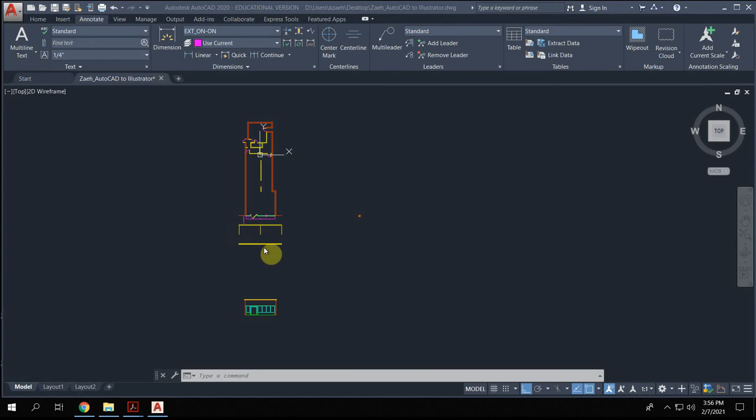Okay, so we're going to be talking about going from your AutoCAD drawing into Illustrator to make your final drawing. I'm going to use the exact same stuff I had for my AutoCAD tutorial in order to do this. So personally, let's take out the dimensions though. There's probably a nicer way to add those in Illustrator.

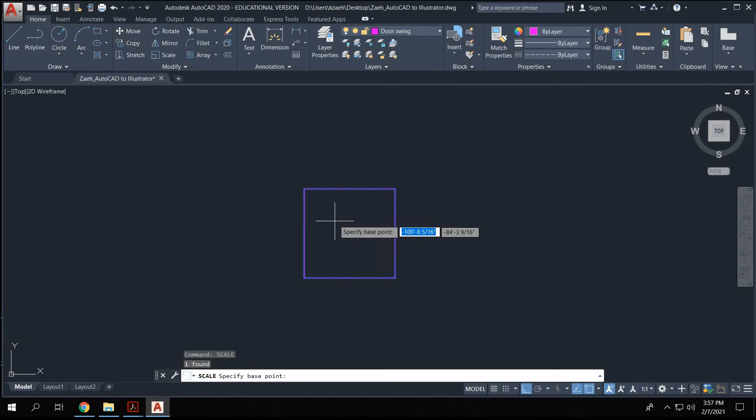Okay, so this represents my piece of paper. I know that my drawing is going to be at a much smaller scale in order to fit on the paper. So to start out with, I always scale it by 12. And automatically, that is what would fit on the paper if we were to make the drawing at 1 inch on my drawing equals 1 foot on my paper, right?

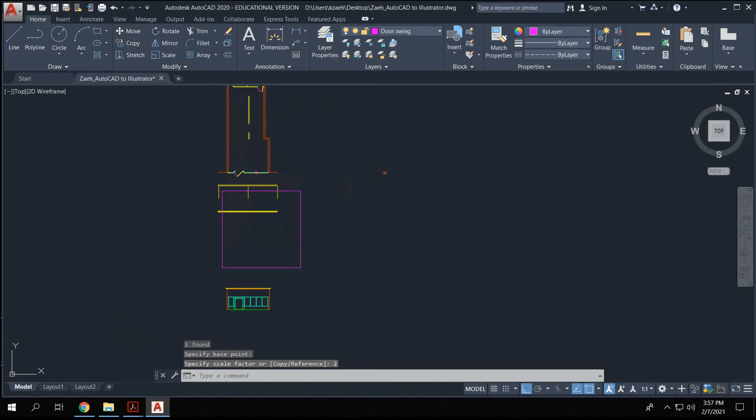We already know from the AutoCAD tutorial that this is going to be about 1/4 inch, I think, or we do 1/2 inch. 1/2 inch equals 1 foot. So I'm going to double the size of this. So I'm going to select it, type in scale to the base point, and type in 2, and that'll make it twice as big. So now this is my piece of paper I'm working with.

And let's see if that feels adequate. I actually think that's way too small. Not way too small, but I think, well, I guess we don't need a lot of the storefront in here, but we still want to get in our elevation. So I'm actually going to undo that.

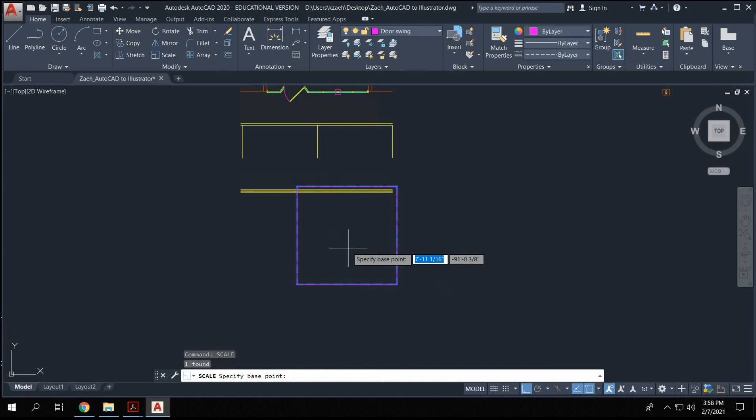So now we're back to our 1 inch equals 1 foot paper. I'm going to scale this by 4. And now if we have our drawing at our main drawing at 1/4 inch equals 1 foot, that's how much space we have to work with. So I'm going to move this. So let's imagine that we're going to fit the plan on here.

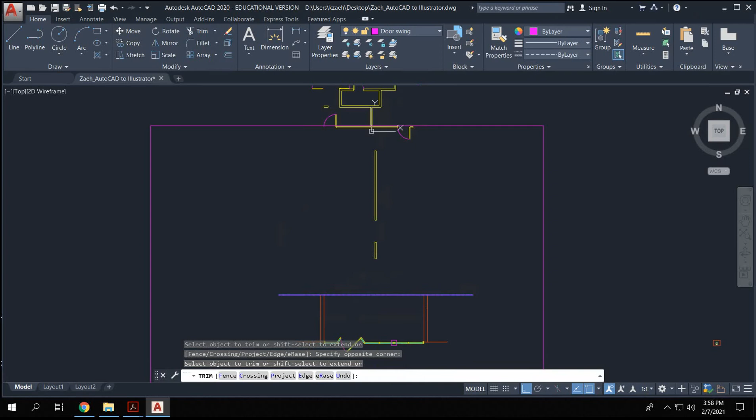I don't want all of this plan, so I'm actually going to chop off what I won't use. So I'm going to draw a line here and then trim off the whole back of this that I'm not planning to use in this drawing. And I can make this a break line so that I know that this building continues, but my drawing does not. So to do that...

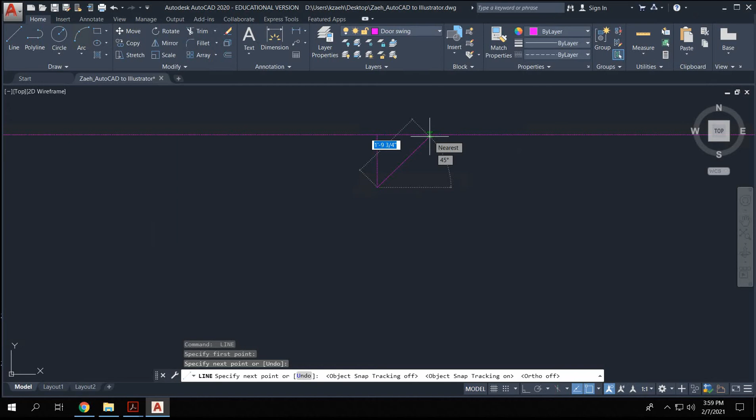I'm going to come to the middle of it, draw a line straight down, and then a line, I think it wants to be at 45 degrees. Let's turn off my ortho so it'll be happier doing that. So I think it wants to be 45 to there, click, and then same thing on the other side.

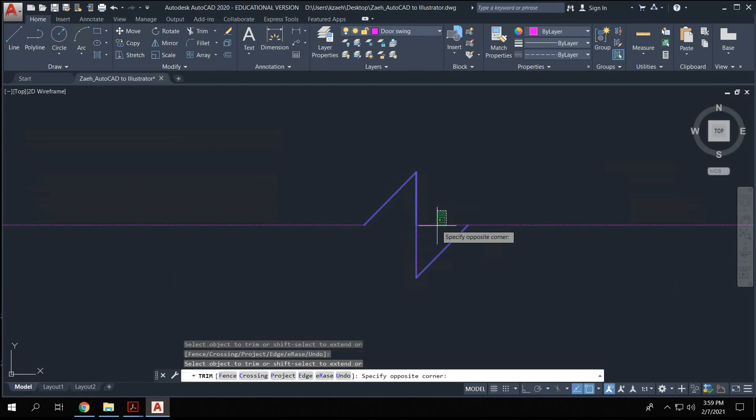So I can just take this and mirror it once. And then I can take it and mirror it again. And then I can delete this and trim out the middle. Trim out that, trim out that. Okay, so now I have my little break line that explains that like this building keeps going, but my drawing stops here.

So I have this. I like to get everything lined up ahead of time, so I know that I want my elevation above my plan. So I'm going to go to my guidelines layer, which I think is just 0, and I'm going to draw in some lines that will allow me to do that.

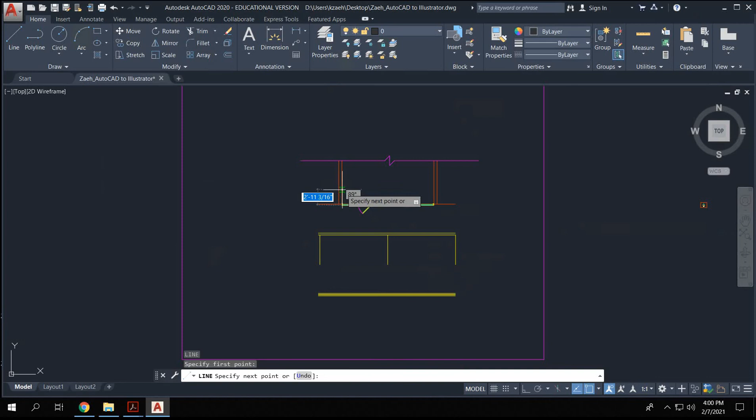So I'm going to bring these. Should I have my ortho off? So put ortho on for this. I'm bringing these lines straight up. And then I'm going to bring my elevation up so I can line it up. And that looks like it's all aligned there. So I'll have my plan there and all my elevation there.

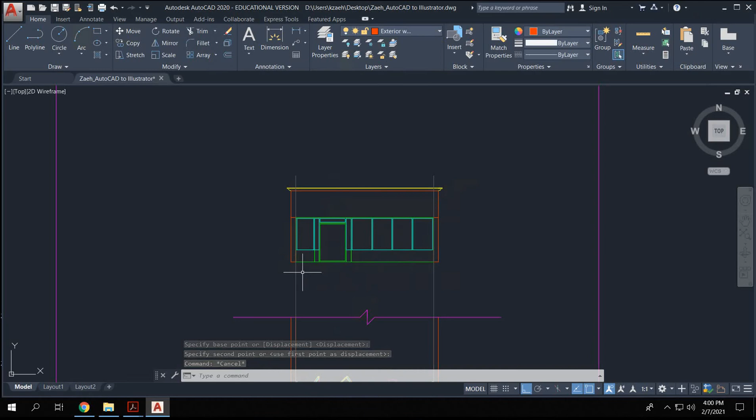I might scoot this down a little bit. And I wanted to have a ground line. It's missing one right now. So I'm going to get my exterior wall line. This is the thickest line I have. And draw that as my ground line here.

Okay, so I have that lined up to that. And then I don't think I want this exactly centered because I want room for our detail on one side. So I'm going to move this over to here, and then we'll bring in this detail later. I'll show you how to do that.

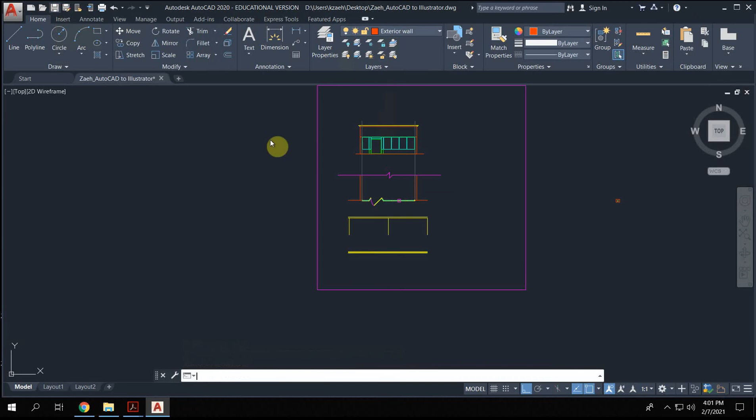So let's go ahead and get this exported. So I'm going to save my drawing. I'm going to select all of this and go to export.

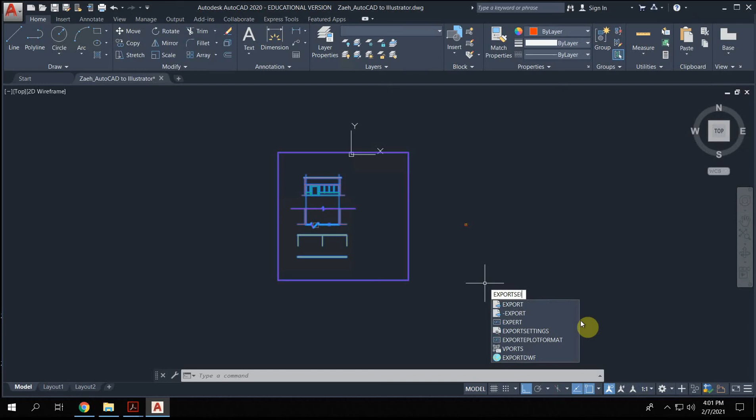Oh, I could export selected. Is that not a thing? Okay, let's try typing in export selected. Export DWF, export plot setting. What if I do export selected? Okay, so that might be a Rhino thing instead of an AutoCAD thing. So I'm just going to hit export, and I think it'll take the whole drawing, but that's fine. So let's save it somewhere we can find it.

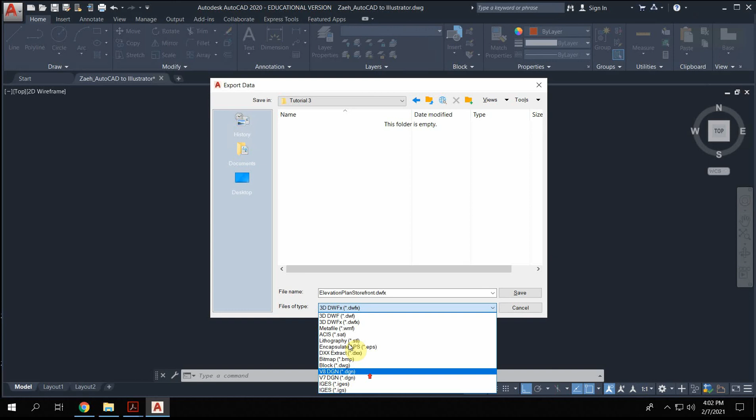And this is going to be elevation plan storefront. Let me change this to... actually, I don't like any of these options. So let's just select this and go to save as.

Okay, I was checking if there was a save selected. There's not, so just save it as a drawing. And we'll save it here. The reason we need to do this at all is because I don't know if Illustrator will read a 2018 drawing, so we need to save it to an older version.

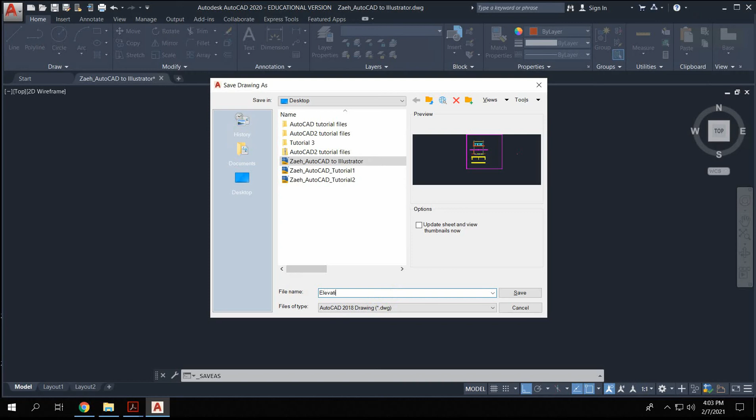So we're going to call this elevation plan and save it here, and change this first to 2007 and hit save. Update relative path, sure. Okay, so I'm going to open up Illustrator.

And you're going to go to open, and navigate to that file. So desktop, tutorial 3, elevation plan, and hit open. This is really important: it's going to come up with DXF DWG options, and when it asks you what scale...

You're going to go here to scale by 100%. And here it's asking you 1 unit is what - like they want you to find 1 unit in your AutoCAD drawing is what over here. So change this to inches - we're going to tell it what we want 1 inch on our drawing to represent.

Let me check if this is going to be in feet or in inches. I think it's going to be in inches, but we might need to redo this. So let's try this the first time and see what happens.

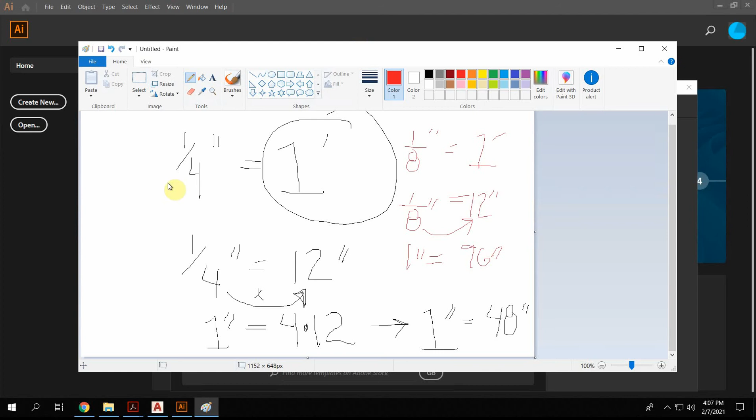That's about the most math we'll ever do in this class. Okay, so moral of the story is, if I go back to here, go to open, find my drawing, I'm going to say scale by 100%, and I'm going to say 48 units equals 1. Make sure you change this to inch.

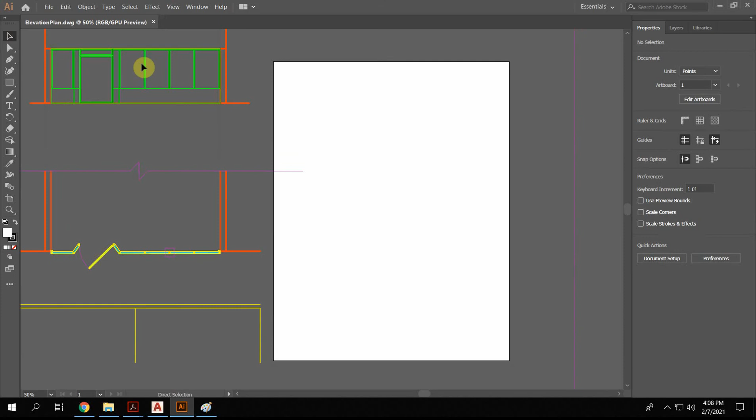And let's see if that works - centered artwork's all good, hit OK. Okay, so that - no, I don't want that. Okay, so control minus, let's zoom out in Illustrator. Control minus, control minus. Hang on, my computer is a little bit frozen here.

Okay, it's caught up to me. So I think this worked right - let's just double check. So I'm going to go to my artboards here and drag out the sides of this. Oh, right now my file is set in points. I hate points, I don't know what they mean. So I'm going to change my points to be inches in just a second.

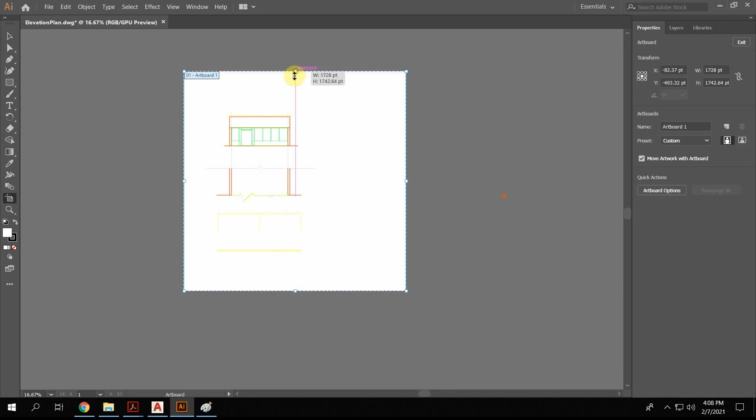So if I go to File, Document Setup, I want to change the units here to inches and hit OK. Now if I go back to the Edit Artboards and click on here - yep, 24 inches by 24 inches. So we're good, we did this right.

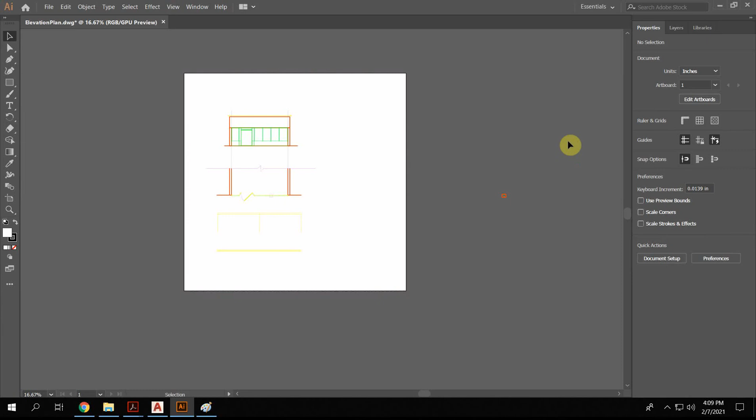So before I do anything else, I want to get this detail that's over here added in. If you see, that detail is super tiny, and that's because we need it to be imported at a much bigger scale. So I'm going to delete it from here, and I'm actually going to save this first.

I'm going to save this in an Illustrator file, hit OK. I'm actually going to reopen the other file, so I'm going to open this again. This time I'm going to scale it differently.

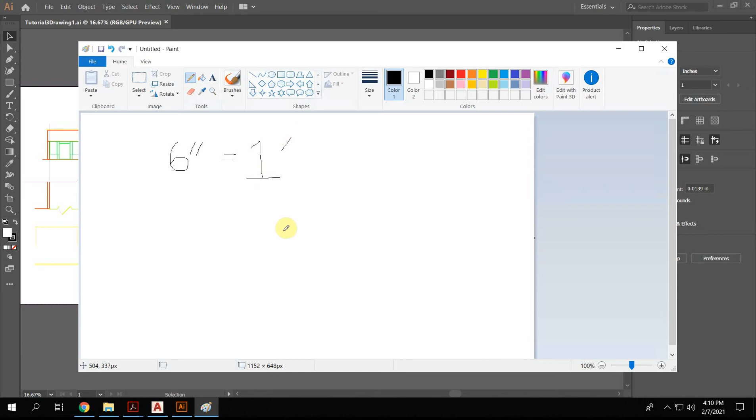So in this case, I think we want to say that 6 inches. Let's do new. Okay, so I think I want to say that 6 inches in Illustrator is going to equal 1 foot on my drawing. I think that's correct, let's check. We can actually look back at this other one we did and check what the scale was. Yeah, so 6 inches equals 1 foot.

So if I go back here, that means that 6 inches equals 12 inches. 6 inch Illustrator equals 12 inches in AutoCAD. So I want to say 1 over here, so I'm going to get this to be 1. I'm going to divide this by 6, and that means that I need to multiply by 2.

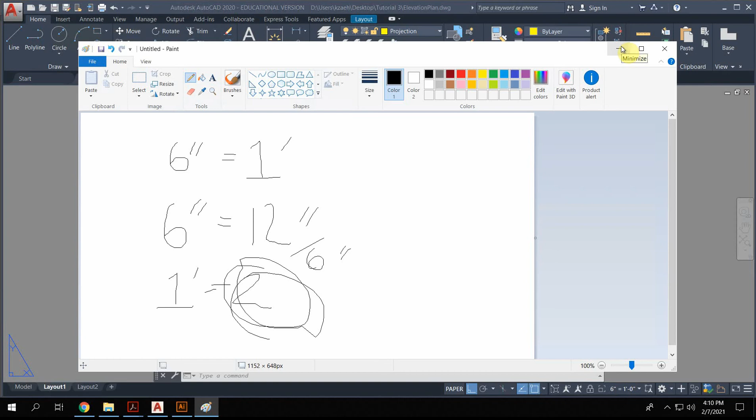So if I come back to here, it's going to say that 2 units is going to be 1 inch. And hit OK. So it might really hate this because it's going to be so big, but I really just need that one little drawing. Yeah, it's going to be too big, so let's get out of this.

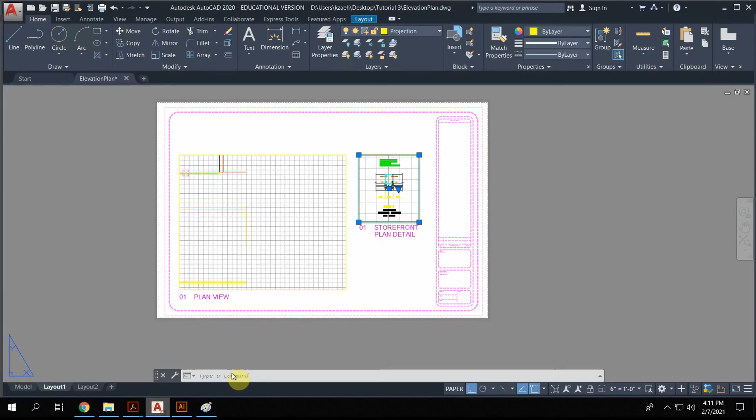We're going to have to make a whole other file with this. I apologize. So I'm going to copy this, Control C, go to New. You want acad, that's all fine, and hit Open. Check your units here, make sure that they are architectural and unitless here. Hit OK, and then Control V is going to bring that in for you.

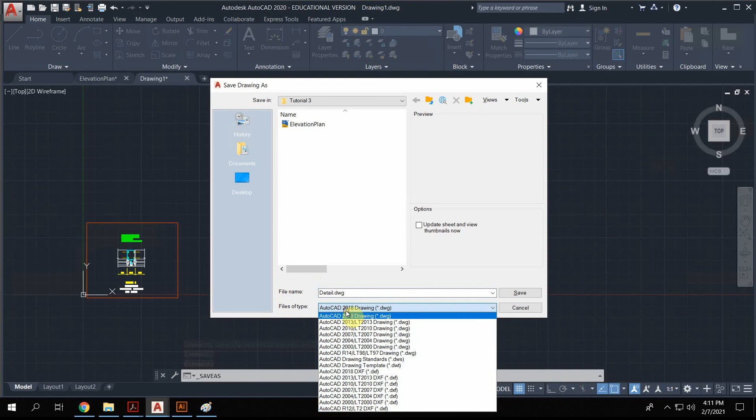Okay, so now let's save this file. So File, Save As, and this is going to be Detail. And you're going to save this as 2007 and hit Save.

All right, so now we're going to import that file instead. So I'm going to go to File, Open. I'm going to get my detail open. And here we know that 2 units equals 1 inch from the math we did before. Hit OK, all right, so I'm going to copy this.

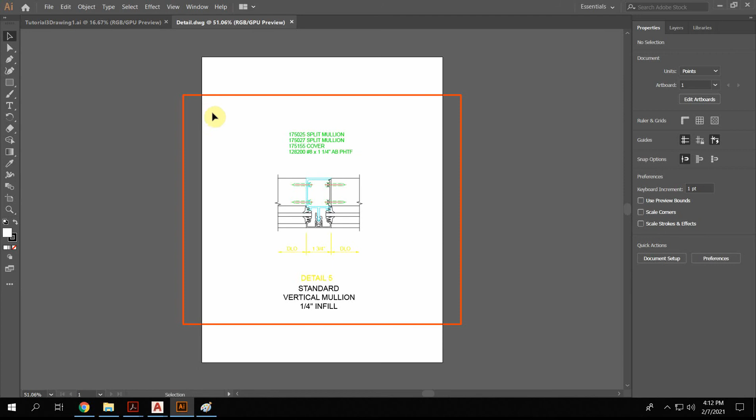And I'm going to just paste it into here. What I want to do before I paste, though, is check that, go to your layers here. And actually, I don't know what yours will look like when you open it. I prefer to have it on Essentials Classic, that's right here. That just gives you more options all the way around.

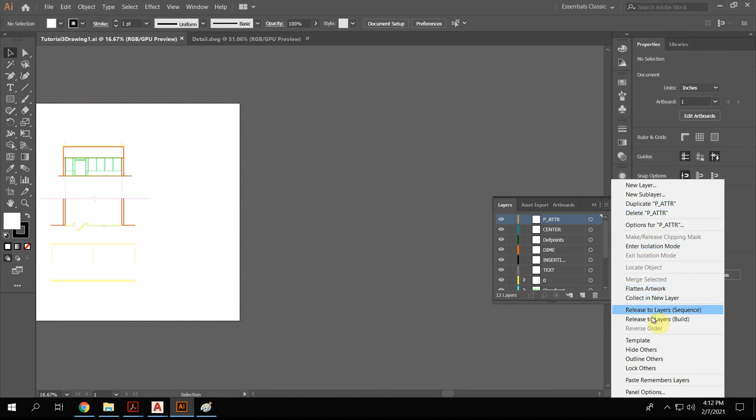So you're going to come to your layer panel here. When you have this open, there's this little options bar. You want to make sure that paste remembers layers for right now. So once you have that on, do Control V, and you can hit Add Swatches and hit OK. Add Swatches, apply to all, OK. And now here's our detail that we can bring in.

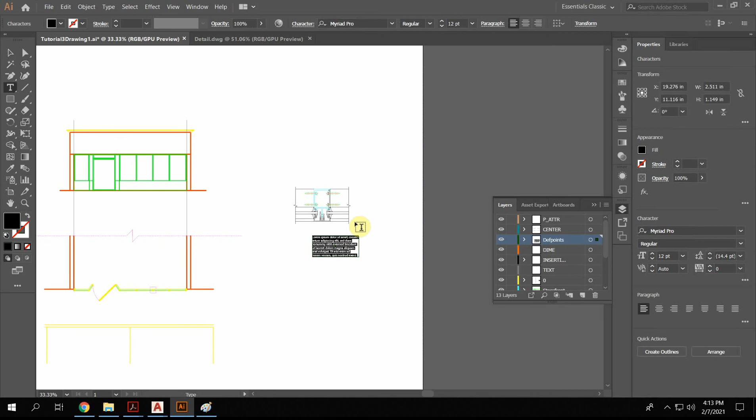So I'm going to get rid of this text for this drawing. Okay, one thing I want to do is make sure that I label the scale so that I don't forget. So on here, I'm going to write 6 inches equals 1 foot, 0 inches.

And I've already made a mistake. I didn't make a separate layer, so I really should come in here, make a new layer, and I'm going to call this text. That'll just give me a little bit better control. To move something onto that layer, I can just move this dot up to text, and that'll move it to that layer.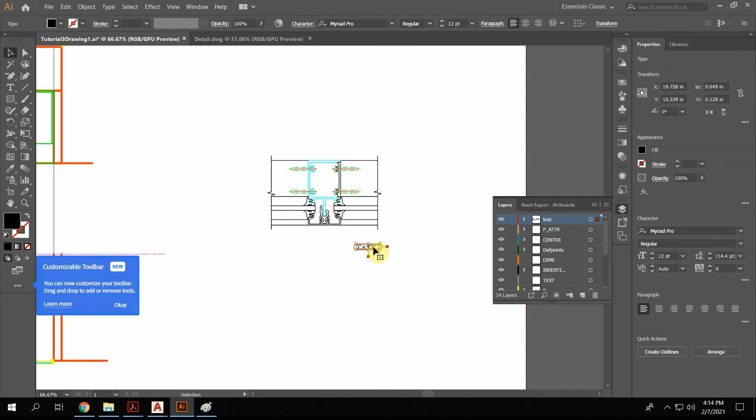Okay, so this is 6 inches equals 1 foot. And then over here... I didn't mean to redo that. Okay, I can copy this, Control C, Control V, and this one is at 1/4 inch equals 1 foot.

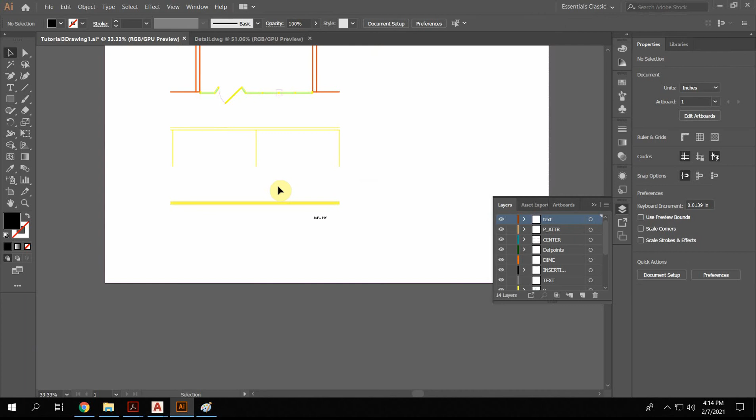So now that I have those two things set, I want to start playing with my line weights. So for this drawing, I think I'm going to make everything black. So I'm just going to do Control A to select everything, and then come over to here, and I'm going to select black here. And then click outside, so now all of that is black, which is good.

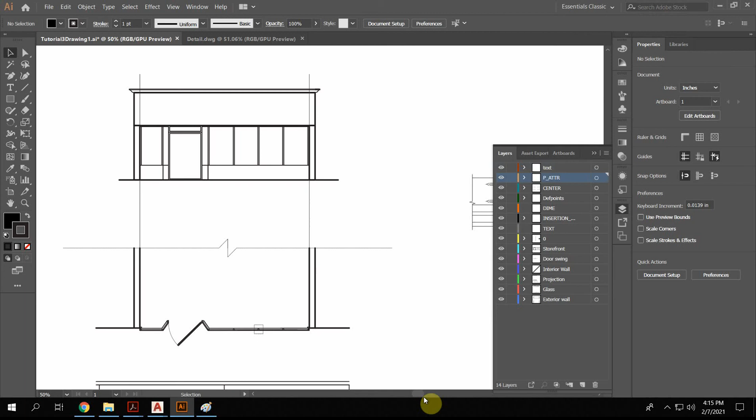The line weights came in from AutoCAD, but I think that they're a little bit heavy, so I want to adjust those. So I'm going to come over here to my layers, and hopefully all my layers will still be here. So these weird ones are from that detail I brought in, unfortunately. I didn't go through and actually change that. So let's see what this selects. If you select this little bubble, it'll show you what's selected in there. I think that's on layer 0. Oh, so all that's on layer 0. Interesting.

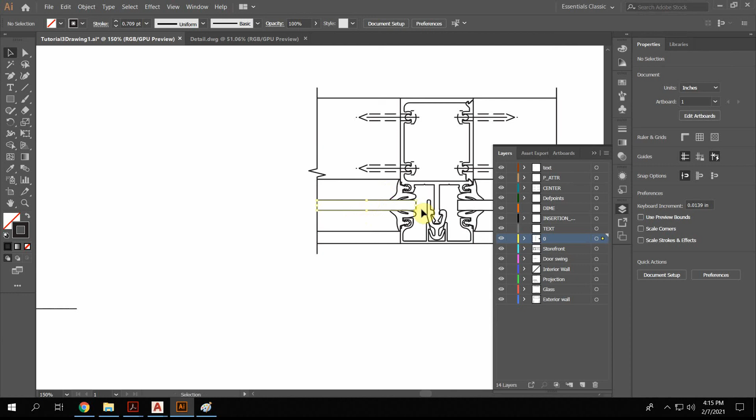So I think because it's a block, it all came in on the same layer, which is a little bit annoying because you have to go in and change things little by little. So for example, if I want the glass to be thinner, I'm going to need to select all the glass here.

So select all those lines, and then I would change my line weight. My line weight you can change up here, it'll pop up. You can also go over here, click on this so show options, and that'll give you more options over here.

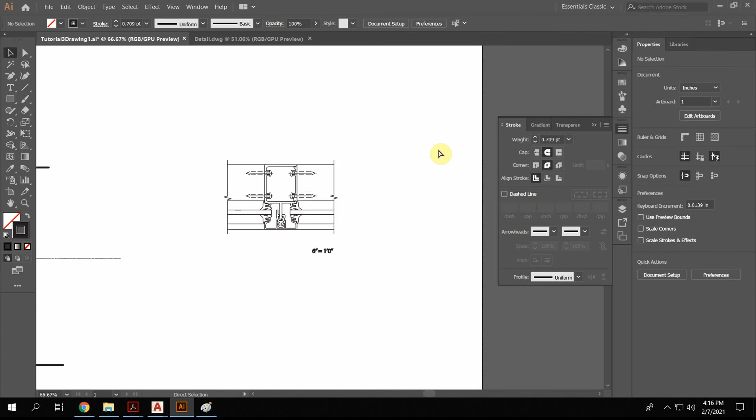Let's do one more thing. Control A to select everything, and then over here, change it so that things have a butt cap. And I would miter joints for the corners. Just so that you don't have weird rounded ends to your things.

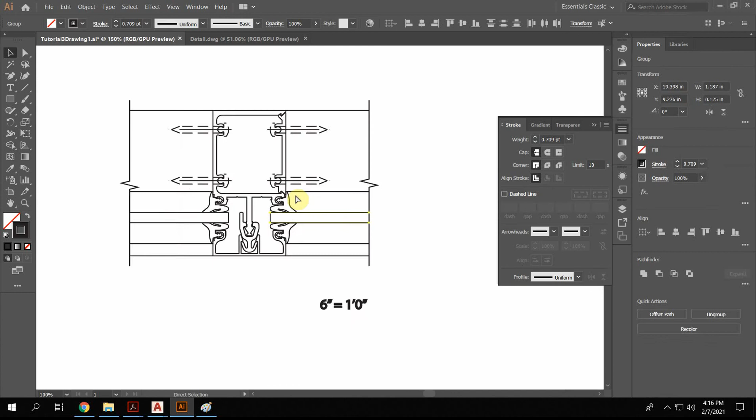So going back to this, to change the line weights, I'm just going to select them. And then these I'm going to make 0.25. That's going to be my lightest line type there.

This stuff that's in the middle, what is that at? That's at 0.7. That's all stuff that's being cut through, so I'm going to see if I can select it, if it's easy to. And it looks like it was all joined, so it should be pretty easy to select. And these things I'm going to change to be 1 point.

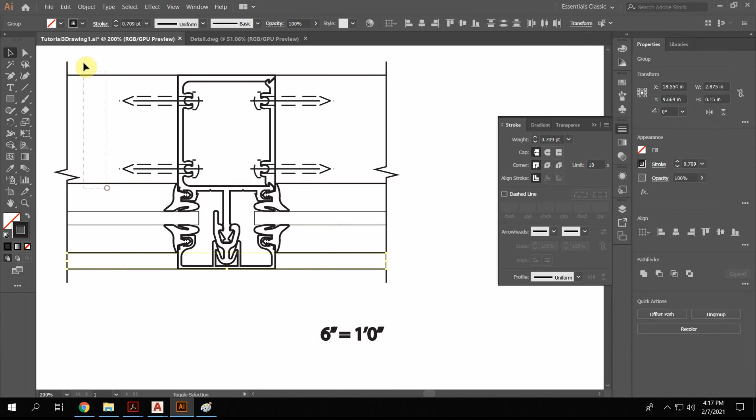And then these projection lines here, they're kind of beyond. Same thing with those, so I'm going to change those to be 0.75 point. These hidden ones I'm going to also make 0.25.

So there are some situations where you're going to have to select things little by little and change them over. And that's a pain because it's nicer when things are on layers and you can change them all at once. Okay, so at least that one's all set.

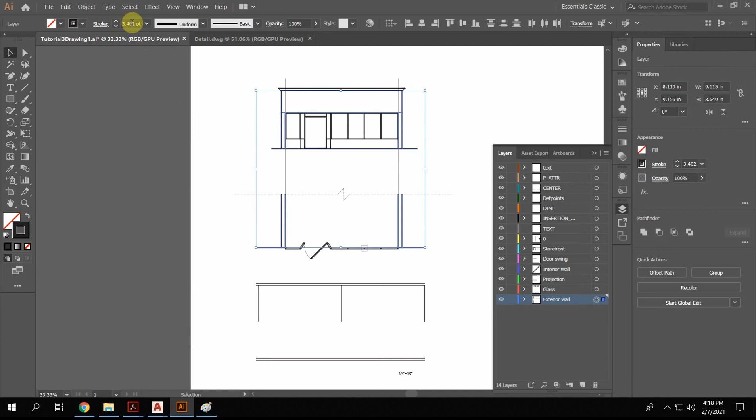I realize that these two look funny because I gave them an outline. They don't need an outline, take that off. All right, so to change all of the line weights in here, you can come over to the layers, and for example, the exterior wall, select the bubble. That'll select everything on that layer, and then change that to be, we'll make those 1.5 point.

Okay, the next glass, let's change all the glass to be 0.25. And I can either change it again over here or up here. Projection lines, let's select all of those and make them 0.75 point.

Interior wall, select all of those. There's only one. Let's make that 0.75 point as well. Door swing—this I put on the door swing, which is wacky. I shouldn't have done that.

So I'm going to move that to a new layer and call that annotation. I'm going to move that to my annotation layer, and I'm going to give that a 1 point. And I'm going to get rid of the dash line because it shouldn't be dashed.

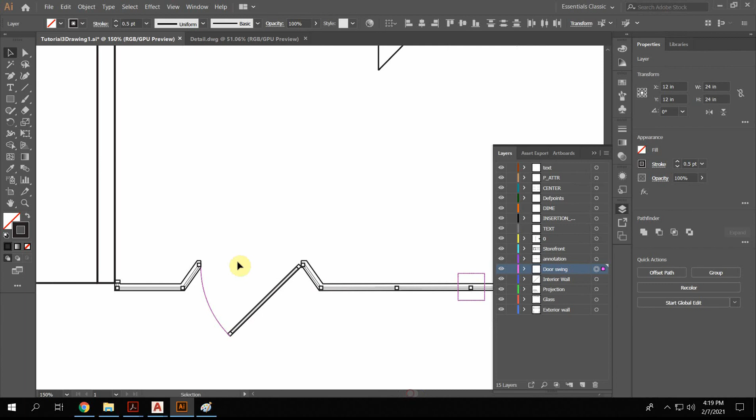So coming back to my door swing layer, I'm going to select all of that and make those a 0.5 line. I want it to be dotted. I think it already is, but it's such a small dot that you can't see it unless you zoom in.

So I'm going to change that over here, and under dash line, I'm going to try like 2 point, get rid of the gap and see what that looks like. That looks better, so we're going to leave that like that. Those are all looking pretty fine.

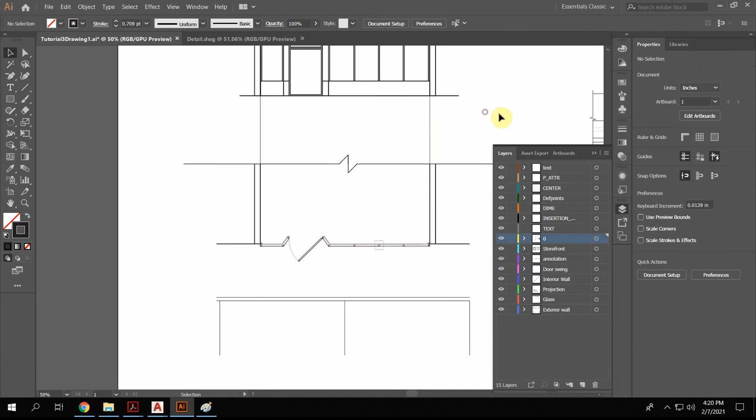Okay, so did we hit all of them? Our guidelines I don't think got hit, so those are on this 0 layer. I'm going to select those separately and give them a new layer and call it guidelines. I'm going to move those over to there.

Okay, so my guidelines I'm going to select again using that. I'm going to make them 0.25. And I'm also going to come over here to opacity and change it to 50% opacity so that they fade back a little bit. They're just barely in the drawing.

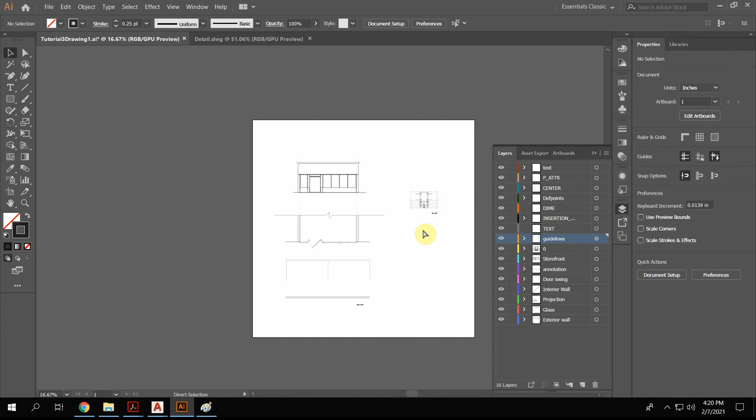The one other thing I want to do is highlight where that detail comes in. So I'm going to select this little box, Control C, Control V, get a second one of it. I'm going to bring it over here, and I'm going to hold Shift as I make this bigger to keep the proportion the same.

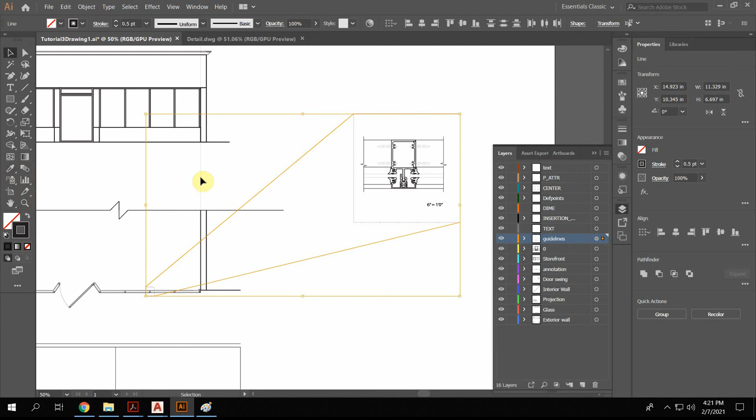So I'm going to highlight that this detail is the same as that, just with some lines. This isn't necessarily any proper convention, it's just how I'm choosing to do this. I want to make sure this line is on my guidelines layer, and I'm highlighting that this corner is the same as that corner is the same as that corner. I'm going to change these to have the same weight as that, and I can use this little eyedropper to pick up the style from there. That highlights that this detail is coming from there. That's a really easy way to do it.

And that's it for this drawing. You can add color if you want to, so that would be done over here. You could also add some patterns, so I'll show you how to do that in case you're interested. I'm going to make a whole new copy of everything.

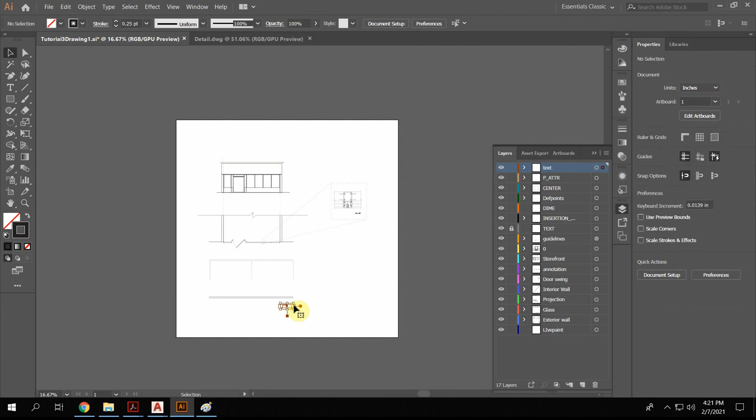I'm going to make a new layer called Live Paint and hit OK. I'm going to lock my text. My Live Paint layer is going to go all the way to the bottom. I'm going to select everything. Something tells me my text is not actually on my text layer. Oh, I have a second text layer. That'll do it. Okay, so I'm going to select everything.

Hit Control C. Now I want you to do Control V, but take off the Paste Remembers Layers option, so turn that off, and then do Edit, Paste in Place. At this point, come over here and make all the stroke lines none, like that.

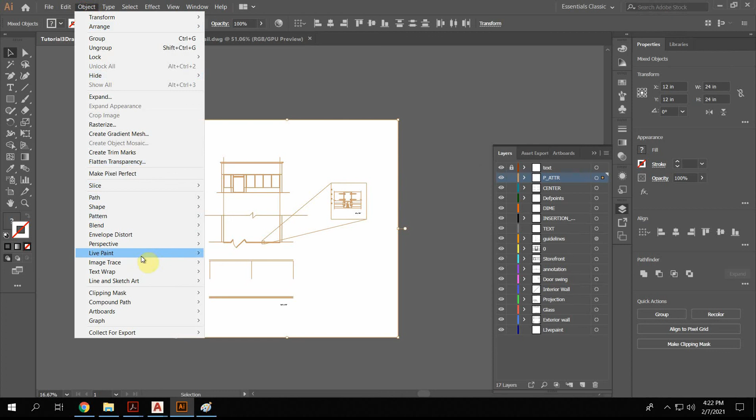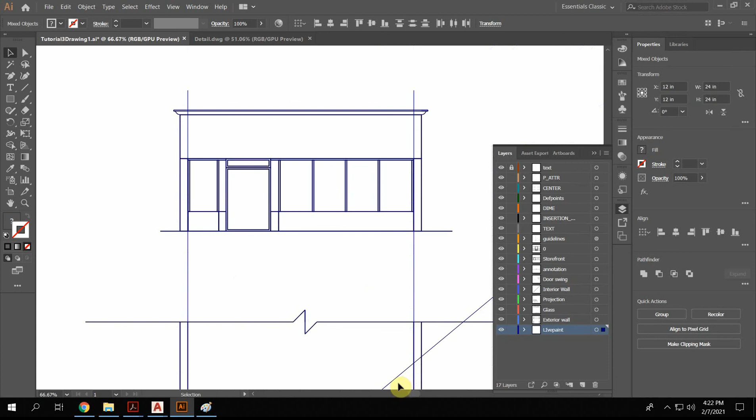And then go to Object, Live Paint. Oh, it doesn't like something that's highlighted. So what's probably happening is there's some other text in here that is messing it up. Just in case, I'm going to move all of these onto this layer, so at least it's on the right layer. And then we've got to see what's messing it up. I'm guessing it's in this detail that there's some text.

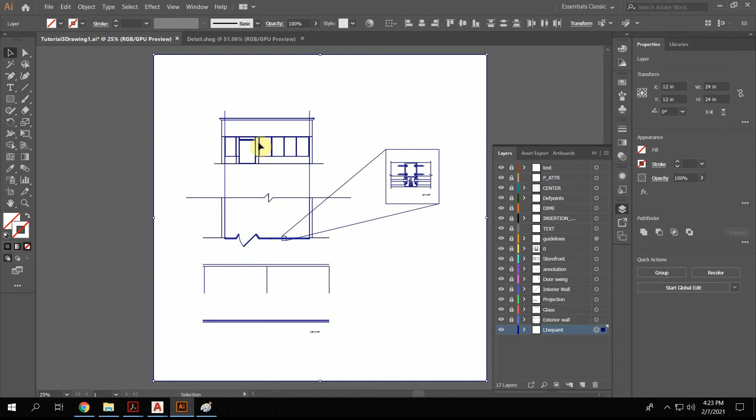It doesn't let you add text to a Live Paint object. Maybe those little things? So I'm going to lock everything else. I'm going to select all that again. And I'm going to go to Object, Live Paint, Make. Okay, so that was it, it's those little things.

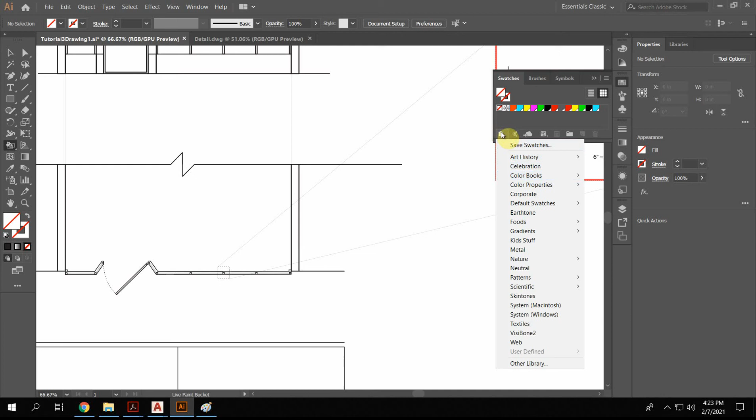And so what that's going to let me do is let me paint in some things. So if I come over here to my Live Paint tool, where is it? Over here underneath the Shape Builder tool, the Live Paint Bucket - it makes it into a giant coloring book, which is pretty awesome. So I can come over to my swatches, which are right here. I can go to these little books, which are your libraries of swatches, so I can go to Patterns, Basic Graphics, maybe some basic graphics lines, and I can choose any of these and color in the poche so that really stands out.

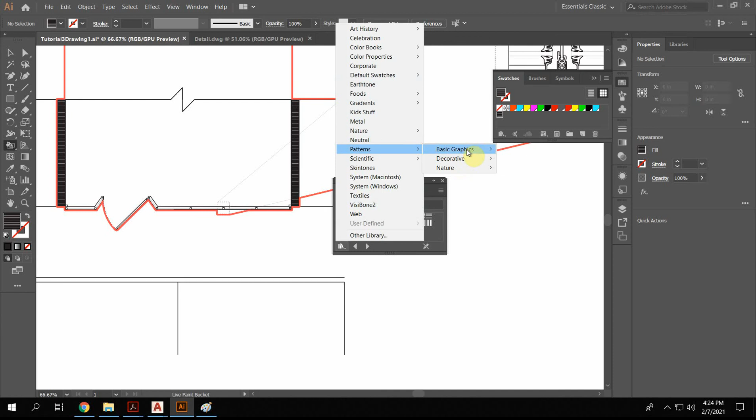Or maybe, for example, I want to do something to highlight where the glass is. So I could go back to Basic Graphics, get one of these dot textures, and maybe use that to highlight what's glass in this. All right, that is it.

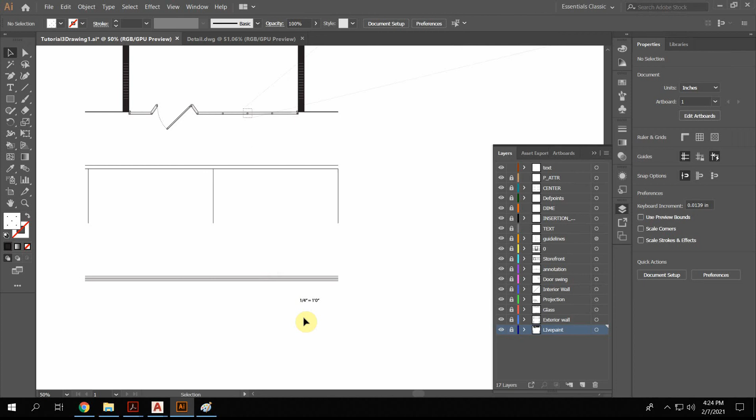The last thing that would be nice to have on here, beyond the labels you can add - if I go back to my layers, lock all this, and then unlock my text layer. So it's great that we have the scale written in, but it would be really nice if we could have it be actually graphic instead, right? There are different ways to do this. I prefer to actually go back into AutoCAD and make it.

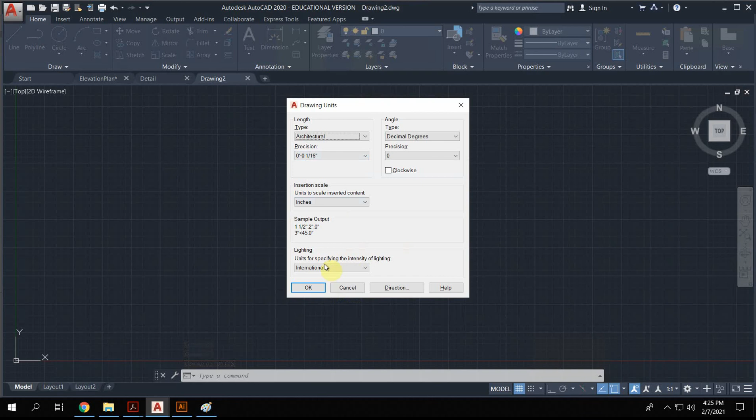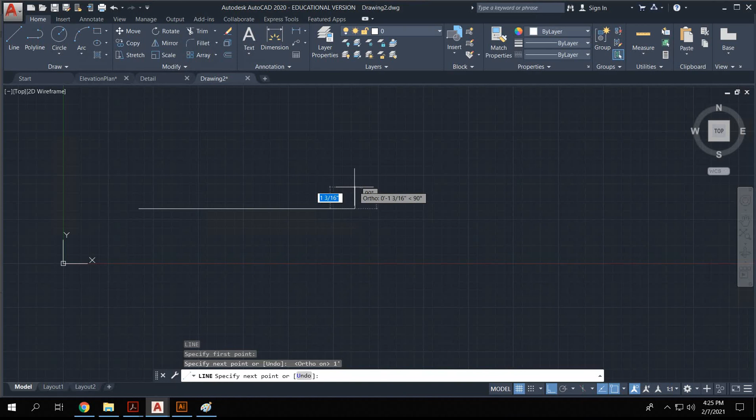So I'm just going to go to AutoCAD and make a new file. Units - architectural, that's all fine, and change this to unitless, okay. So here I'm going to make a line, get my ortho back on, and this one is going to be like 1 foot, and then it's going to come up, I don't know, like 2 inches, and come over to here.

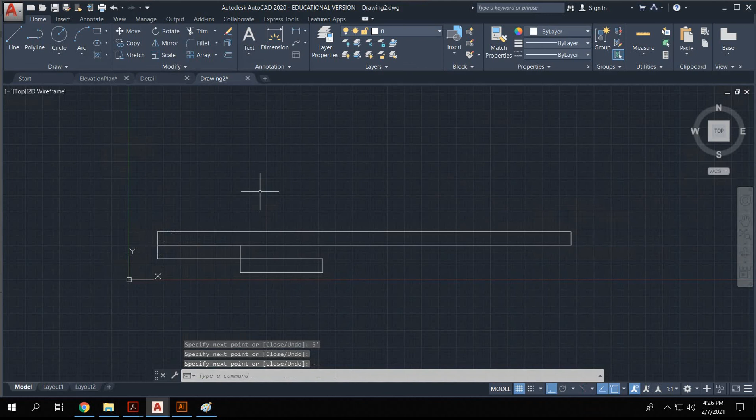Okay, so I'm going to take this - I know that's 1 foot, right? That's going to be 2 feet. And then I like to have it also for 5 feet. So line, coming from here, 5 feet, 2 inches, 5 feet. And I should have really joined all those to begin with.

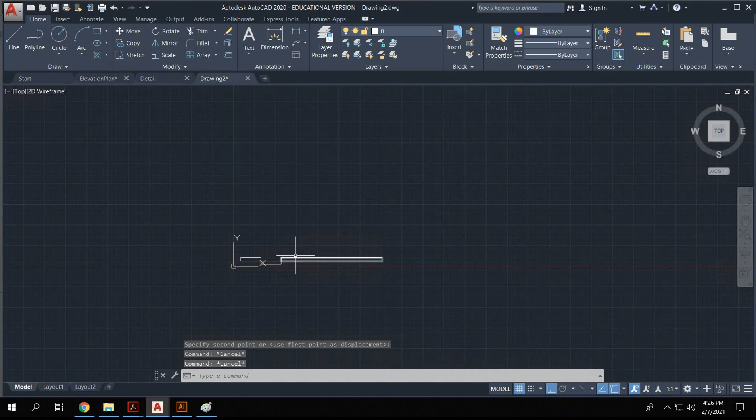So this is going to be 1 foot, 2 feet. The 5 feet, though, I really want to start back here. Right now I'm just trying to figure out how I want to lay this out. So maybe what I'll do is continue the 1 foot, 2 foot pattern for 5.

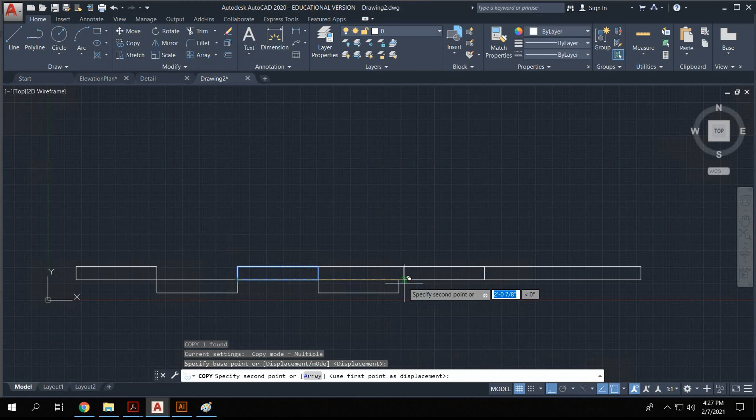That's like 5 feet. I'm going to move this over. That's 5 feet, and so I know this whole thing is 10 feet. Okay, so this is the graphic scale I'm going to use, and I can label it once I get in there. I'm going to save this and make sure it's 2007, and call this graphic scale.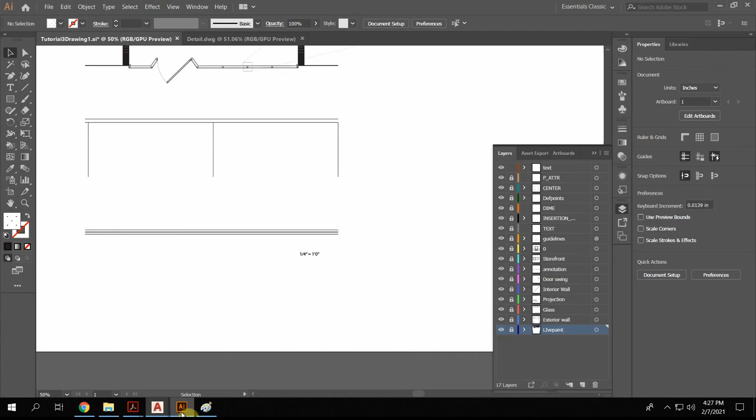Okay, so I'm now going to come into Illustrator and open it. The first time I open it, I want to scale it for the 1/4 inch drawing. So I'm going to do 48 units equals 1 inch. I'm going to select all that, reverse it so it becomes all fill instead of lines, Control C, and bring it into this drawing, Control V.

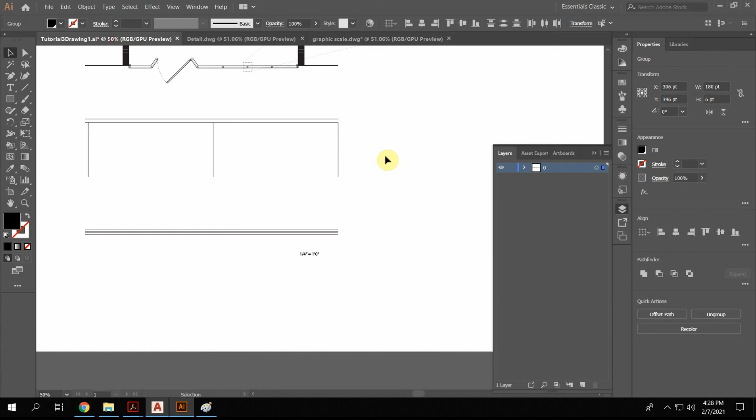Yes, why not? Okay, and so that went onto my live paint layer, which isn't great. I'll bring that up to my text layer. So I'm going to have this bar under here, 1/4 inch equals 1 foot, and I just want to label on here also what the main demarcations are.

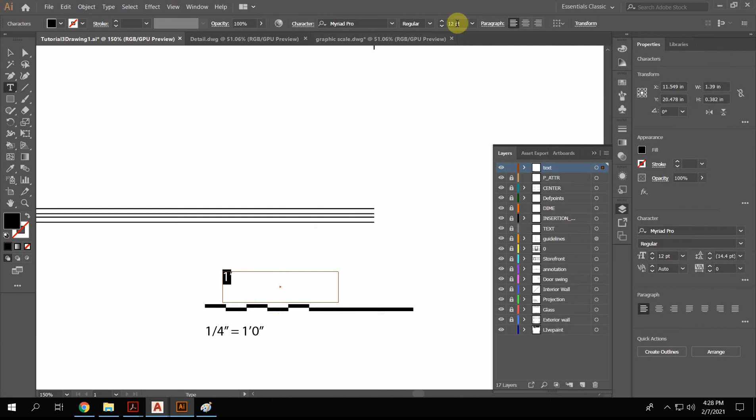So here I'm going to put in 1 foot, and I want this smaller, it's way too big. Let's make this like 6 point. So 1 foot here, Control C, Control V. This is 5 feet in the middle.

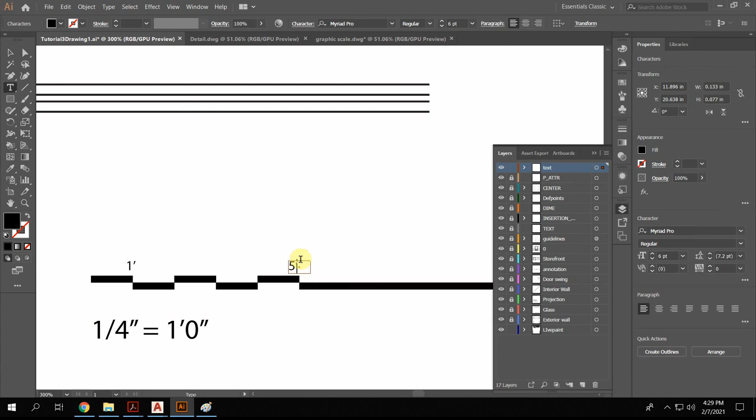And then I can, oop, I'm missing the apostrophe. If you just hold down Alt and drag with Shift, it'll copy it for you. I'm going to make this 10 foot. Okay.

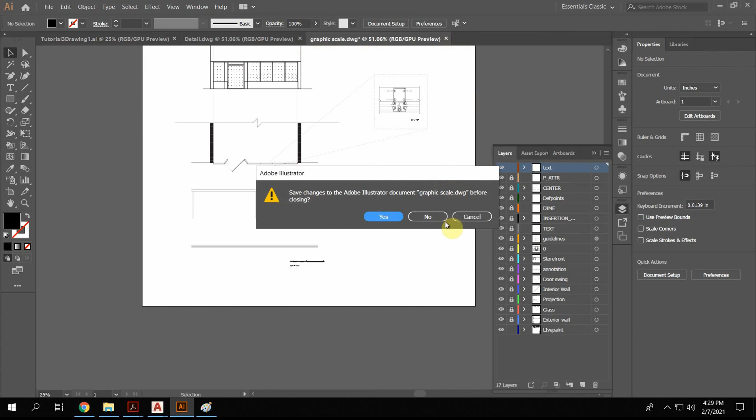I'm going to do that one more time, but scaled for this other drawing. So let's save where we are. I'm going to delete that. No, okay, so File, open up that graphic scale drawing again.

This time I want to say that 2 units equals 1 inch. Hit OK. So it's going to be really big this time. And we actually probably don't need this full thing in here because we'll just go up to 5 feet.

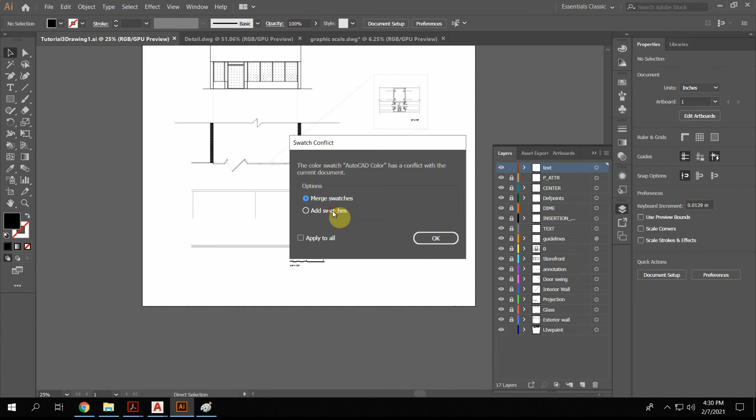So I'm going to select all this, reverse this, Control C, for 5 feet. We don't even need 5 feet, but we'll bring that in and then judge. Okay, Control V, add swatches, okay. Yeah, so that's way too big.

So I'm just going to have like a line that explains what 1 foot is in here. We'll write, because 6 inches equals 1 foot, so it's literally 6 inches. So that's too much, so I'm going to delete these out.

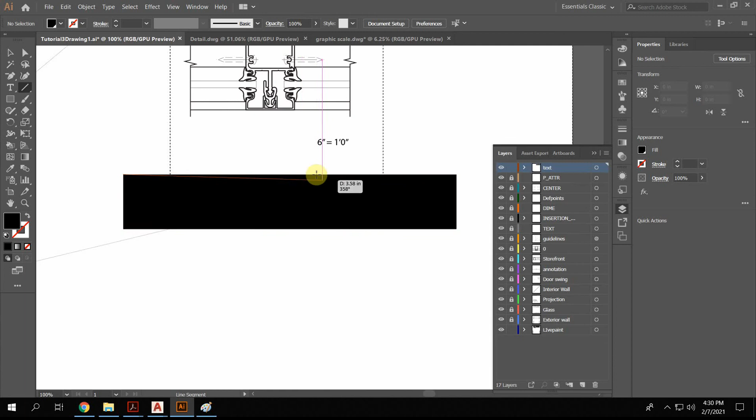And for this one, I'm just going to make a new line that goes to the middle of this. Is it going to tell me where the middle is? I'm intersecting too many other things.

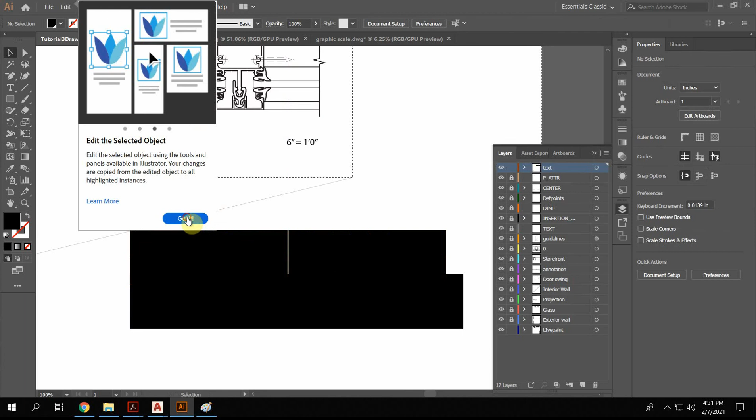Okay, so one way I can do this is by Alt, copy this over. I'm going to make 2 of these. So I'm going to do Alt, control the other one over, get those so they line exactly up.

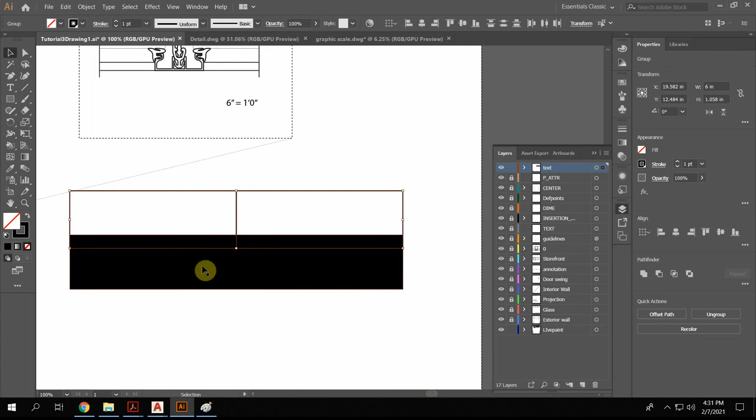I'm going to take both of these and just hold the corner until it scales to the corner until it hits that end, and then that one hits that end. Okay, so now I know that each of these is 6 inches.

And I'm going to make a slightly different symbol. So I'm going to have a line that goes from here to here. I'm going to give it a little bit of thickness. Let's give it like 2 points of thickness. And then I'm going to have 2 end lines.

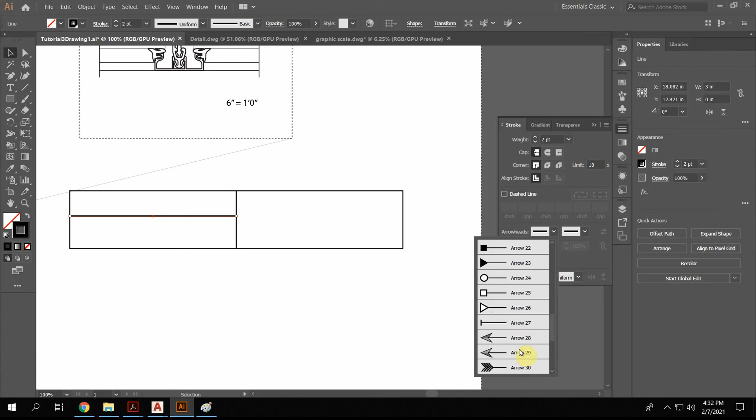So, or actually I can just, if you click on it and go to stroke over here, you can add arrowheads, and I think there should be flat ones. Yes, I can add a flat arrowhead and another flat arrowhead on both sides.

And here I'm just going to put in a 0 and a 6. So, 0 inches. And over here, this is 6 inches in the drawing.

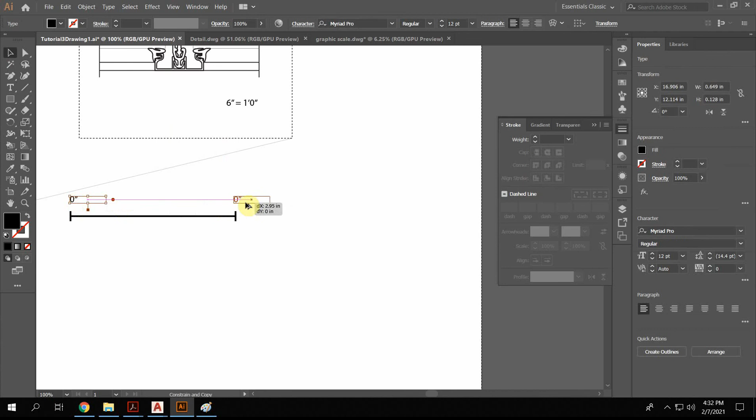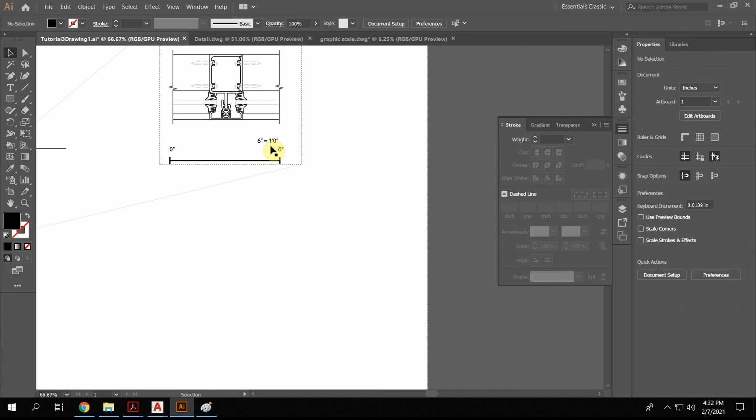So those are 2 different kinds of graphic scales. The whole idea of a graphic scale is that if somebody prints your drawing without doing the right scale, so maybe they hit like print to fit, this will still allow them to find at least a relative way to measure and understand the drawing.